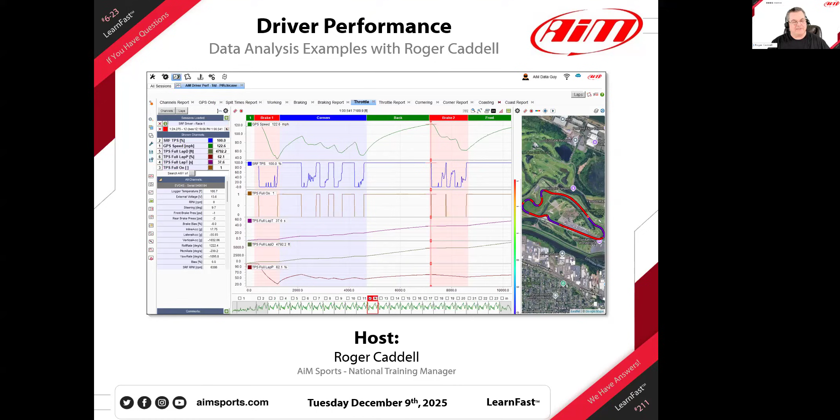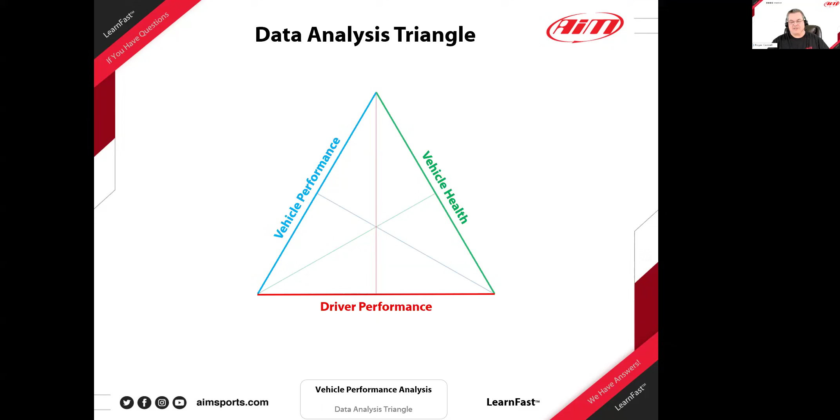So I always kind of joke about it a little bit and say, maybe this data analysis triangle is better shown as a Venn diagram, right? So you could think of it this way as well. The theory is all kind of the same, but it helps people get rid of a bit of the complexity of the data if you start to think of it this way.

The other thing I always try to make sure everybody understands, we're starting over with some of the basics here real quickly, and then we're going to jump in. I kind of build 3 basic steps for the whole concept of when you go to look at your data in analysis, what you really need to do is start to think: what happened?

I've given a few examples. You're faster average speed in turn 1. What happened? It's yes or no, black and white. I lost time braking into turn 6 compared to my previous laps or against my teammate. I accelerated better out of turn 9. These are not questions, these are just facts.

You can look at your data, you bring up two speed traces and you can look at it and say, hey, I gained some time right here, I lost some time here. So the next step is where did it happen? What happened? Where did it happen? Why did it happen?

So we're going to go across: what happened? Faster average speed in turn 1. The where piece wasn't necessarily clear, but we have to start to break it down in order to analyze the data. You got to think like a driver, think like a racer. We got to break down that corner, break down where it happened, because different things will be the why.

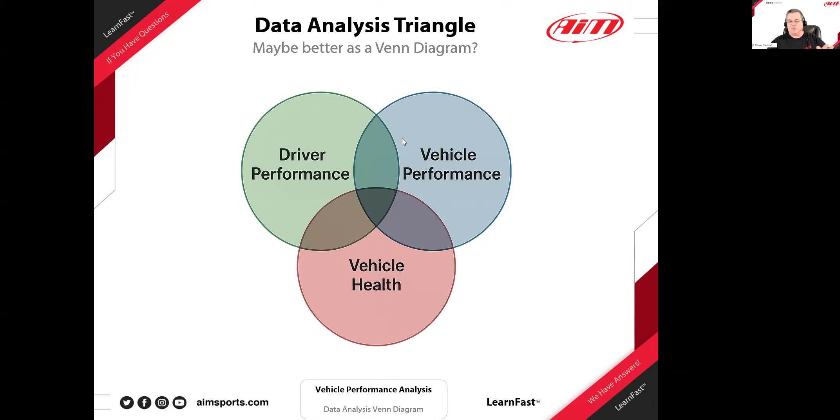If it's vehicle performance you're worrying about, kind of push the other two off to the side. They're always there, but really focus on one or the other. And then on the vehicle health, just look at your temperatures and pressures and other things, and don't worry about this. That really thins down the amount of data that you're being overwhelmed with.

Okay, and then of course you got to walk through these questions of understanding to jump in there until you get enough experience to know exactly where you want to jump into. A little bit about what we're going to do today with some of these user profiles. These are set up for you to kind of jump in and maybe skip a few of these steps once you get a handle on it.

I always think this one through - I say it in my mind: what happened, where did it happen, why did it happen. I say that because it helps me focus on drilling down and not jumping ahead and skipping a step, which can send you the wrong direction. So keep that in mind.

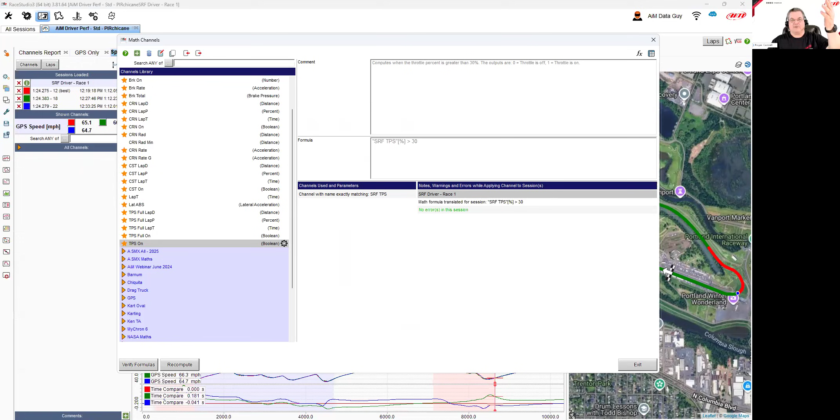Math channels are available for you. Download that zipped file and import those into Race Studio 3, and you'll have those available for you. So I'm going to jump out of that.

Let's talk a little bit about—let's go right into how I set this up. This is a user profile that in this case is called AIM Driver Performance Standard. Let me hook those in here—I'll put these into the chat box in case you missed it. I know when you join, if I put them up there earlier, you don't see them in your chat. So there's the standard user profile we're going to look at first, and then we're going to look real quickly at an advanced user profile.

This is the standard one, it's the same exact thing. You go into your user profiles box icon, you open it up, and there's the import and there's the export. So all you got to do is import it in—click on this, it takes you to it. You have to unzip it and put the standard AIM file onto your hard drive, and just import them into here. Then they will show up in your profiles manager.

The way I like to do it is it's really important to plan ahead to make your data analysis easier at the racetrack. You can do all these—you have data at home already, probably from your car. So you can come in here and set all these up sitting in your easy chair watching a little bit of TV, and you can set these up, save them, get them ready to go.

Then when you head to the racetrack, all you should have to do is download your data, apply this user profile, and come in here—we try to set things up with some tabs that make it real easy for you to go and look at the individual things you might want to look at. In this case, there's a braking and there's a braking report.

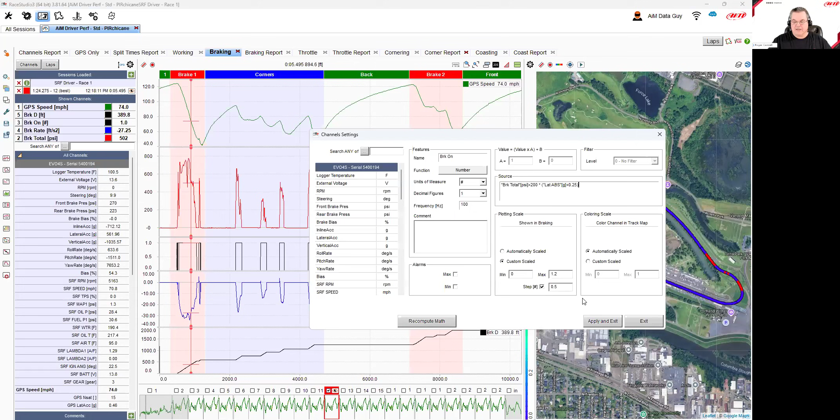So let's get out of there, and then let's zoom in on this brake one zone just to see and understand what the driver is doing here. We're looking at driver performance analysis, right?

So I'm zoomed in here, and we can see the driver comes up and the brake pressure starts to build, then it comes back off, goes back up, and there's another release here in the middle. Remember, this is his best lap - he was probably passing a car, so there was probably some movement there. We'll maybe pick another lap to look at.

So what kind of improvements? Let's say this was a good straightforward lap, and they're all like this - I don't think they are - but the thing we would want to talk to this driver about is that we really want to build this pressure up pretty quickly, hold it right near maximum braking, maximum pressure, and then start to trail off. This additional pop of the brakes is typical here at Portland.

You come here and then you got just a little bit of a straight, and if we were to turn on the throttle position here real quickly, you'll see that there's actually a blip of throttle where the driver throttled up for just a quick second, then hits the brakes again just before throttling up coming off the corner. So that's not an error, that's not a mistake, that's a typical way of looking at this particular track.

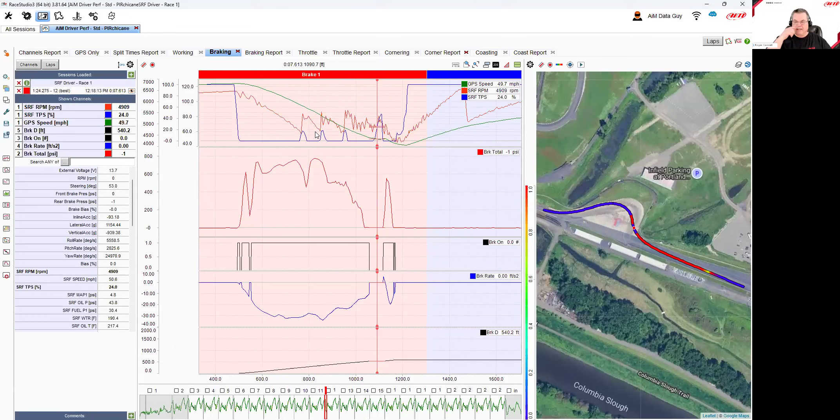At this point, the next thing I would do is I would probably back out just a little bit, and I would probably just grab another. Let me back out all the way here, and then let's just grab a different lap. That one there looks similar, right? I was just going to jump in and see if this kind of looked the same, and so let's pick a couple of other ones just for fun.

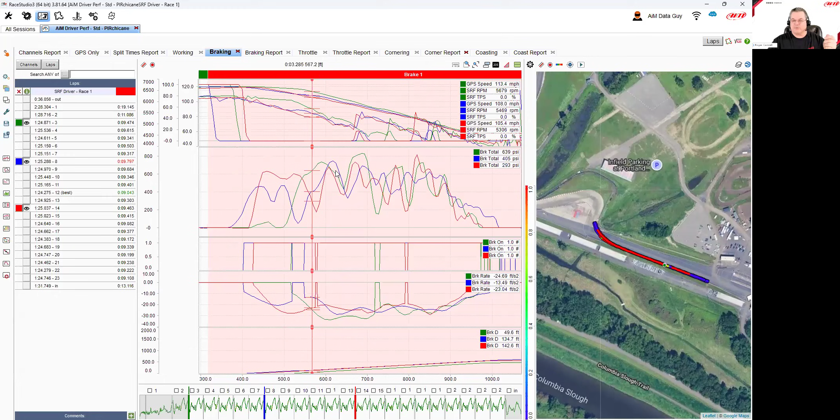Now that we kind of zoom in a little bit, we can see the driver does that quite a bit. This is probably an area of improvement. Some of these are out on the normal line entering in there. There's our what happened, where it happened, why it happened, what's something to put into the driver's little black book of things to work on and improve in the future.

Okay, perfect. So the next thing I want to do is I not only look at graphs for brakes, I also build a channels report that might be very helpful for you to look at.

Now it's a braking report. We've kind of used our math channels, some of our math channel data, some other things, and so here, what I've done is I've created a channels report, and it's the brake total. Again, that's front plus rear brake pressure, and what's the max pressure that the driver used at different times.

Looked like pretty early, the general trend here is there was a little bit more pressure at the beginning and a little less pressure here at the end, down in the 700s, 800s, and some 900s up here. And does that tell us something? We could dig in and look.

Here's the number of feet that the driver was on the brakes. Brake D is brake distance for this entire lap. This is the number of feet the driver was on the lap. When that brake on switch was turned on, this is showing how many feet. This is how many seconds.

These are all parts of the math channels we did, all built into some nice little things built in, ready for you to look at and not have to reset it up and make sure, try to make things happen real quickly. So kind of a handy little thing. That's some ways of looking at braking.

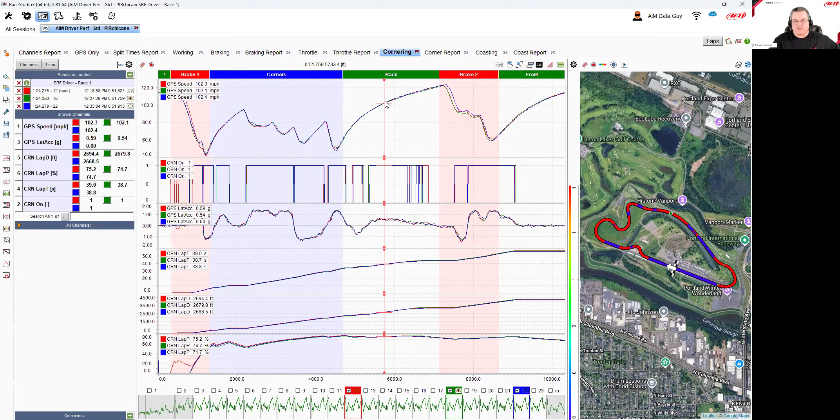I probably would adjust that down a little bit to make sure it doesn't capture that as a straightaway. But up to you, do it as you wish.

Here's the distance, and here's the percentage - real rolling time and percentage that the car is turning. Kind of interesting data just to be able to jump in and see it. We have the corner report. I'm going to go over this one a little quicker, and the next one even quicker yet, because we're just showing you what's available to you.

And then coasting, something that we all want to know about, and see if there's something. Let's get back to a single lap just to make this a little bit easier to see. On the driver's best lap, what is coasting? How do we define coasting here?

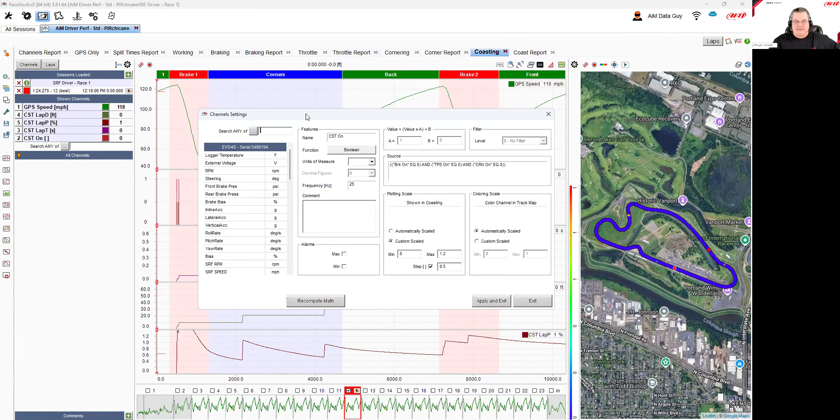Let's hit the little channel options button, channel settings. Coasting in this case is if the brake on is equal to 0 - remember the brake is only on when you're on the brake. So we're basically looking for when you're not on the brakes, as we've defined it. Remember brake on was above 200 psi.

If you're not on the brakes, your throttle position is equal to 0, so you're not above 85% throttle, and the cornering is equal to 0 - in other words, you're less than 0.25 Gs laterally. If all of those are true, we get a 1.

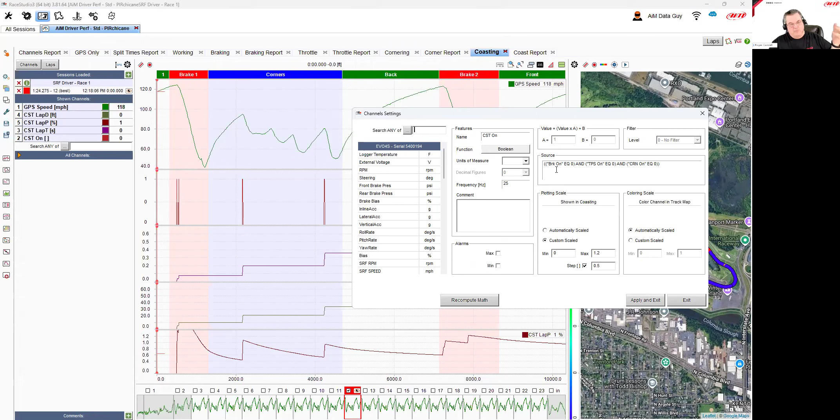If all of them are zeros, this one's going to be a 1. If any of them are a 1, you're not coasting. You can be going through a corner and not be on the throttle, not be on the brake, but at high Gs in a corner, we don't consider that coasting, even though you're not on the brake or throttle, if you're producing enough lateral Gs.

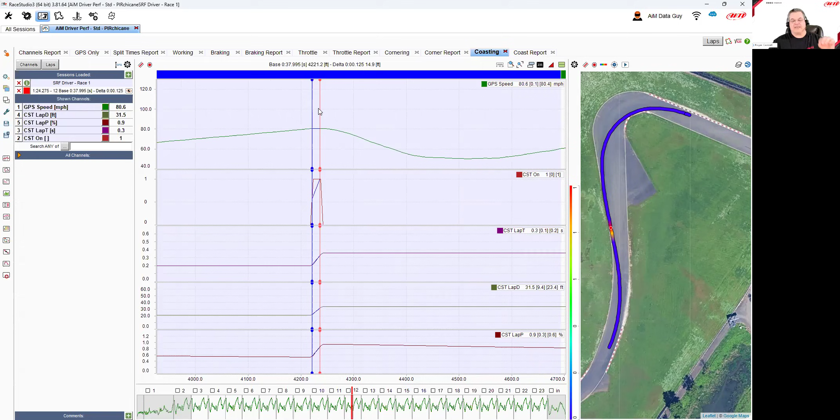So when we get in there, we can see that there are a couple of spots where there is, and most of them, if you look closely, it's going to be in a little transition period. It's typically when the driver is coming before - he's still going in a straight line, but he's transitioning from the throttle off, before he hits the brakes. If we hit the delta function here real quickly, this is really 0.125 seconds.

So keep in mind you're never going to stay coasting long. I always like to show that because people look at this and think, boy, this driver was coasting quite a bit. Well, in reality, if we put this at the end of it, that coasting was 0.8, and it was all transition periods between throttle and brake.

If they're a newer driver and you're coaching somebody, this is a really, really helpful thing when they come in and maybe they coast a little bit at the high speed transitions from high speed into corners.

As John says in the chat box, I found this data - John has shared this data, allowed me to share this data in the past here, including some questions he had. This is John Barnum from our chat, it's his son JD running at Portland.

So I used that session. I wanted to use somebody that was fairly skilled, so we could really look at and get in and look a little bit closer.

And so you can see percentages of laps, how much distance the driver coasted. Distance was only 83 feet. When you're doing 120 miles an hour, 83 feet goes by in a real hurry - only 0.8 seconds. Okay, and then a coasting report.

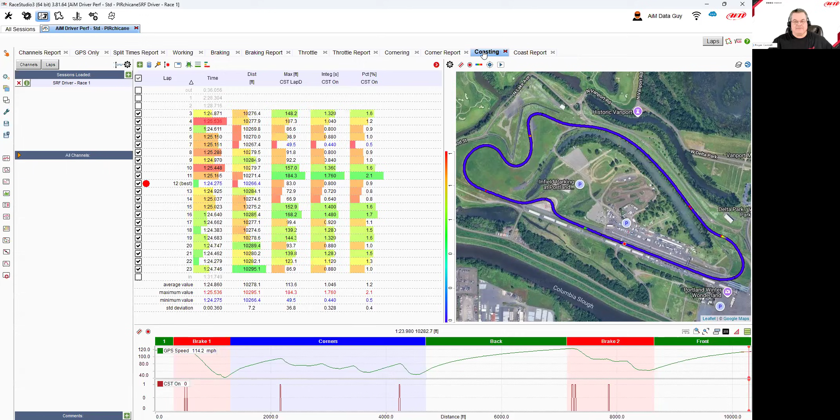We can come in and say, okay, what was the distance per lap that the driver coasted? There's a couple laps here - the one just before his best lap was only 83 feet, which we were just looking at, and the lap before was 184 feet. Let's go in, just for fun, and look at the lap before - instead of lap 12, let's look at lap 11. Let's turn off that one and see where that big difference came in.

And we're just going to rescale this a little bit. Here, 1.8 seconds and 184 feet. And there was a pretty long one here that might be a little bit still in the transition, but that was a little bit of a longer time, and a little bit right after it, as maybe he lifted.

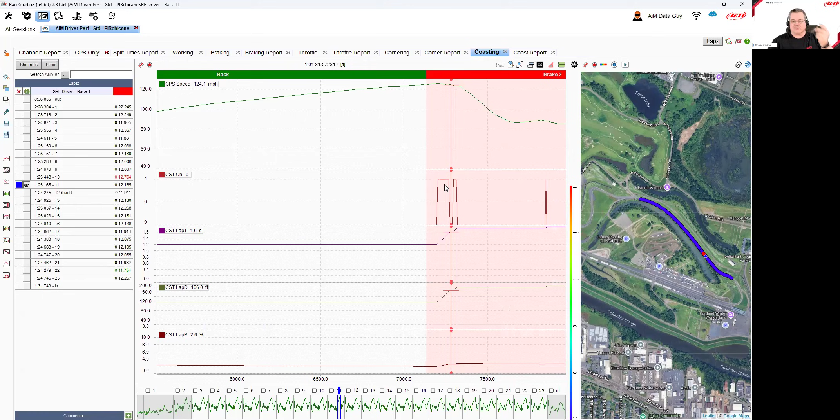We could turn on channels, figure out why, what happened, where did it happen, why did it happen, right? This is helping us figure out what happened, certainly the where, and then all we got to do is maybe turn on a few other channels to understand exactly why it happened.

So there's a few down over here, but again, pretty close to transition areas, but just a little longer transition on, especially that one right there. Looks like it climbed quite a bit. This one here also quite a large climb.

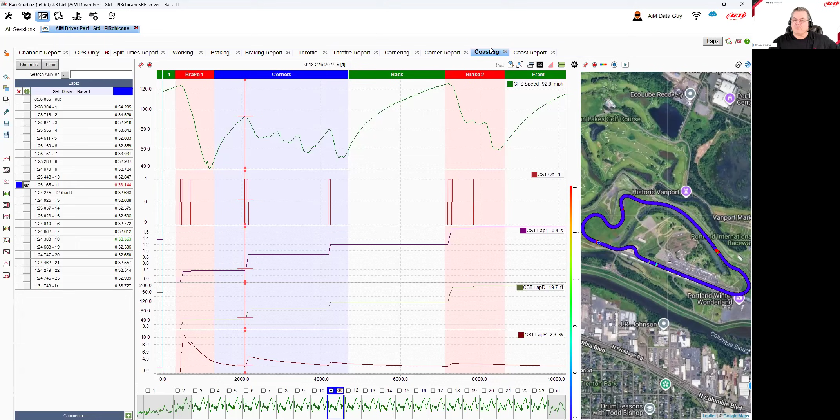Okay, so coasting reports helps us figure some of this stuff out. One other thing I've skipped over real quickly, but I want to go back to it. This one here was kind of an interesting one to me. Just a channel report where we can kind of dig in a little bit and see some other things, right? So I just thought I would show that it's part of this driver performance standard one here.

Okay, we've kind of looked at this one. Let's look at what I'm calling the advanced driver profile. I wanted to kind of split them apart. It's not super advanced, but I wanted to kind of keep them where we don't overload the profiles.

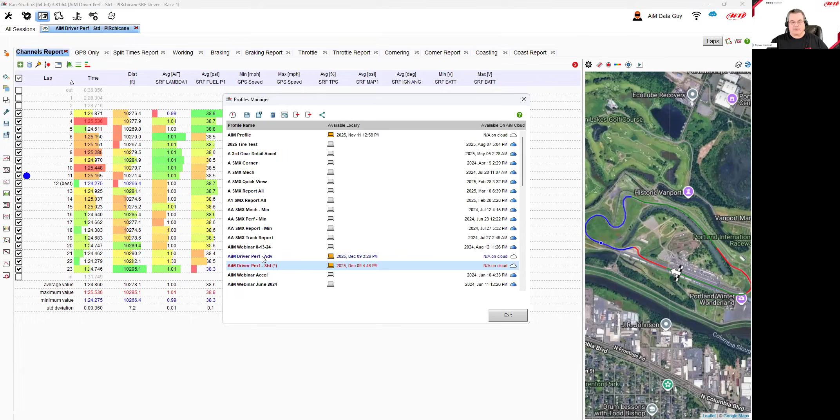So how do we change profiles? It's as simple as going into our profile list. Once you've saved it into your list here, we can come in here, and here's our AIM driver performance advanced. So if we just double click on that, it goes in, retains that exact same data, sits there on that same lap we were just on, and it changes everything.

And this is just a real basic one, but has a few more math channels applied and looking at it in some different ways. And I thought this would be kind of a cool way of kind of closing up the session as we finish up today.

I always end up with a scratch tab. You can call it work, it can say anything, but it allows me a place to come in and just add channels and do different things however I wish to do it, right? Without worrying about screwing up the true tabs that I probably don't want to add channels and change a ton of, at least at the track during the session.

So if we come in here, here's another corner tab. We kind of see the same things we were seeing a little bit ago, but there's a couple of additional things here. There's the speed. We have our corner on. We're going to focus on cornering.

We have a corner rate, and what it is, it's an absolute value of the corners, and I put it in feet per second squared instead of G's. Here's your lateral absolute in G's. So these are exactly the same shape. It's just one is 1 G equals 32 point some feet per second squared. It's an exact value, just much larger number.

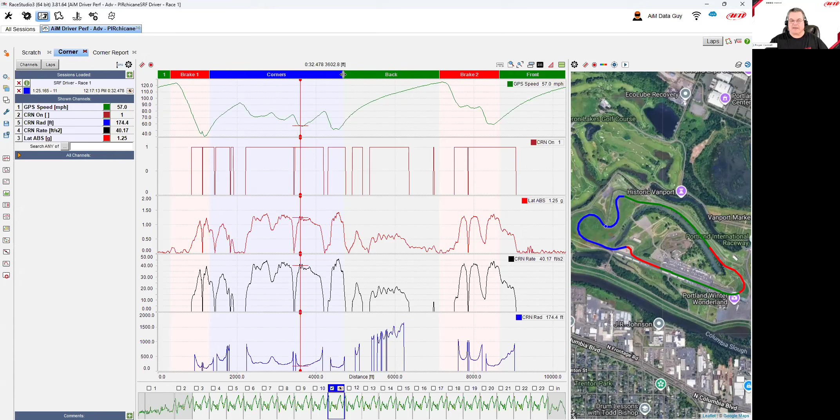So I always create just a bunch of different track map segments. You'll see here there's an acceleration one. I have one for some compliance testing I do. There's corners, there's lap times, there's your standard one for splits, there's one for straights, and there's one here that I saved for a webinar we did.

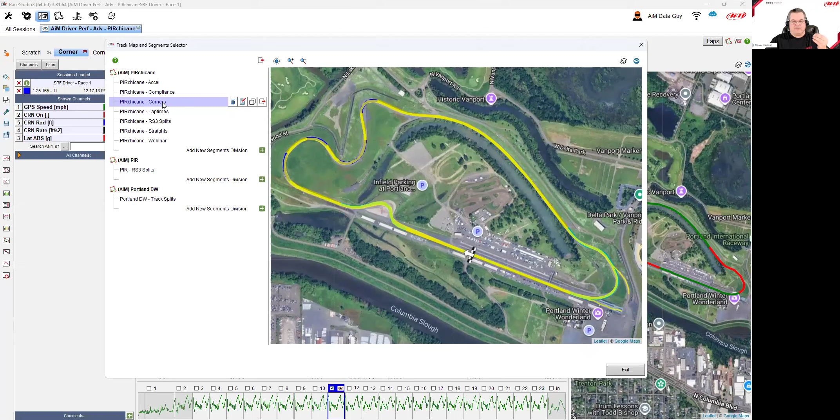So in this case, I'm going to select corners, and I broke the track into different segments, which you're going to see why the power of doing some of what we've been talking about so far, but doing it in a segment-based world is very powerful.

So I'm going to highlight that, and click on OK, or exit. You're going to see that these segments have changed. What I do is I use blue for corners. You can do it any way you want.

If I zoom in a little bit, you're going to see that this is Portland, and this is turn 4 at Portland. You can see there's the dot. This is turn 4, turn 5, turn 6, and turn 7.

Some of these other corners, I've left them a different colored blue. There are some other corners here, but they're not really great for what I'm going to try to show you how to do. So you pick a corner that is basically you G up, and then you sit there for a little bit, and then you come down off it. You don't want one where you just peak and then come right back down.

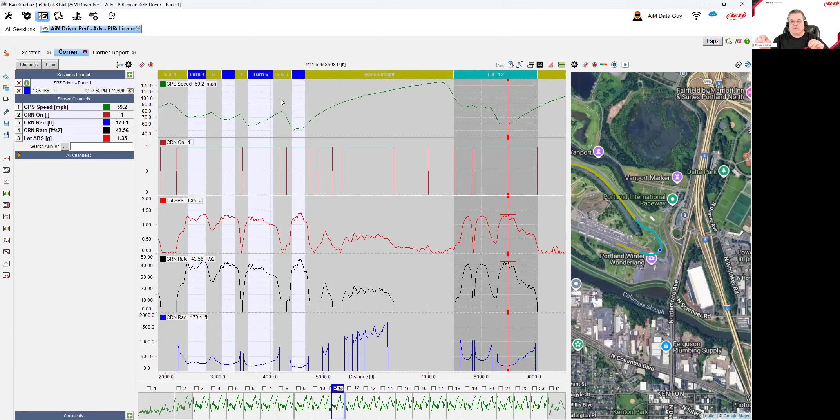We're trying to figure out how good the driver is about getting into the corner, or how good the car is. Getting in the corner, how's the car performing with that driver in there? So we've done some math channels to help us do that.

So I'm going to zoom in on turn 4, zoom back out just a tick. In our corner tab here, you can see the lateral G's. Let me back out a little bit more even. You'll see that we're coming into the corner right here. We're still back in here, we haven't started turning in yet.

I don't want to capture the turn in. I don't want to see how good the car transitions. Maybe I do, but in this particular thing I'm going to show you today, I want to show you that I broke down the segment of turn 4 when the car achieved maximum G's, and I looked at a number of laps, and it's pretty consistent here. And then over here is where it was still at max G's before it started to fall off. So I segmented the corner and called it turn 4.

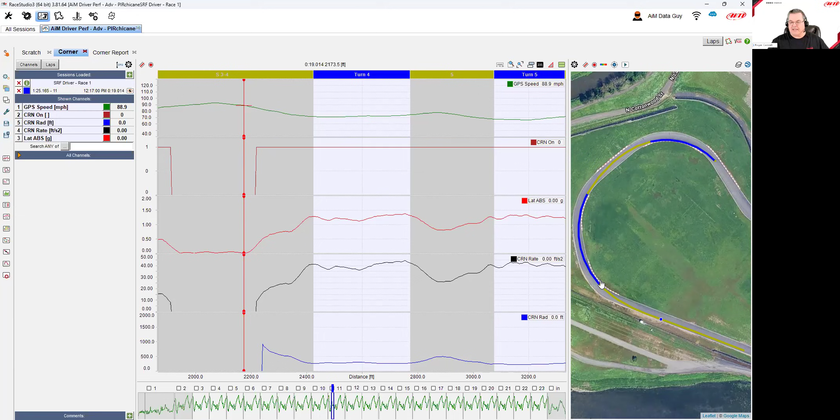So basically the car is at full lateral G's here and full lateral G's here. What I then want to do is see how the driver drove the corner, as far as did he diamond off the corner. You can kind of see he released his hands a little bit here. This number is a little bit bigger, 302, than 261. So right here the driver tightened up the corner in this area. Little things like that. I want to know what the average G's were in here.

So let's go to the corner report, and let's show you some pretty interesting things you might want to be using in maybe some of yours.

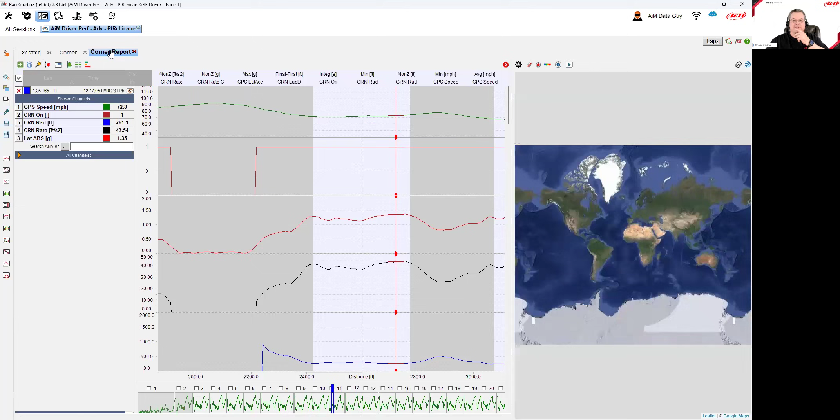Here is a very detailed way of breaking down a corner, but this is the entire lap. In this case, I've turned on the segments. I've told it I want to see the segments in this particular corner report. So I'm going to go down to turn 4. Here is turn 4, and kind of some fairly interesting things here.

Let's go to turn 5. It might even be more interesting. Turn 5 is this corner over here, right? So what we're looking at is how much time it took to get through the segment.

It's the Race Studio software, the corner report, this channel report. If you're using segments, wherever you broke the segment start and end, it's telling us what the time you were in there, the distance, and then I've done some things here where I took that corner rate and done the average outside of zero, non-zero, giving me the average when it was not zero.

Here is the average for this corner for every time through there in feet per second squared. Here it is in G's, for those of you that are a little bit more comfortable looking at G's. Here's that.

Here it is the maximum G's that the driver hit in the corner. You can see this is about 1.38, 1.14, 1.36. And here's the average G's in the corner. Something you might want to know.

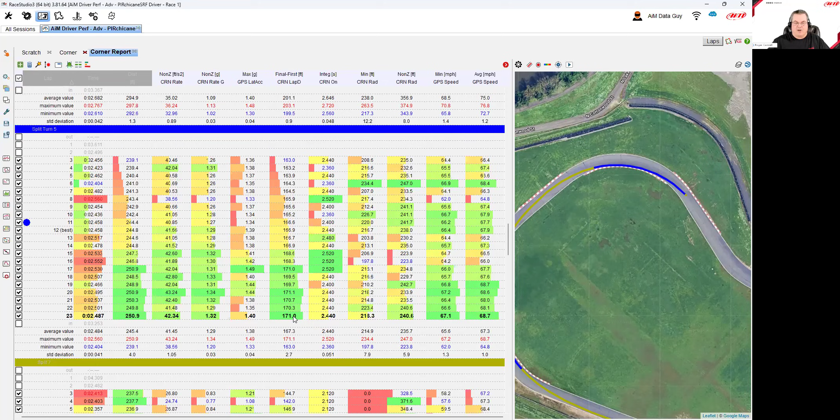Let's leave it on this one for a second. Let me go back to the corner, I want to show you something. Remember we talked about how the driver kept getting longer in distance, as we close this up. Let's go back to the corner, and let's go back up, let's zoom out so we can easily change laps here a little bit easier.

Let's leave this one in the middle, let's grab an early one and let's grab a late one. I'm just randomly picking here, and now we can jump in here. Remember, it was this corner here that we were looking at. Let's change the layout of that real quickly.

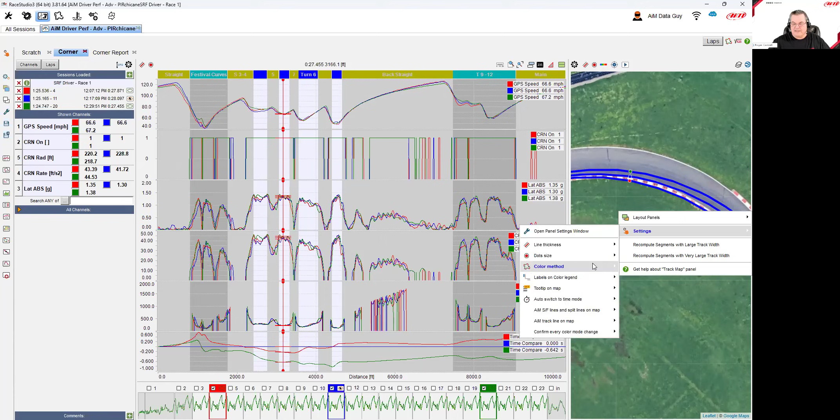So now I'm going to do it a little bit differently. Color method, let's color it by lap. Okay, so the green one was a little bit later.

Let's zoom out on that a little bit so we can see the whole thing. Maybe a little bit more. Let's move this over just for fun, make it a little easier for everybody to see.

Remember, the red one is the early lap 4. Look at how it was tight and holding it tight coming off the corner and getting set up for this next corner, maybe a little bit better. The blue one in the middle, remember, started to run a little bit longer laps, he was starting to free it up. And then the green one, even more so, even a little bit earlier, he started to free up the car. Driver may have had a good reason for that.

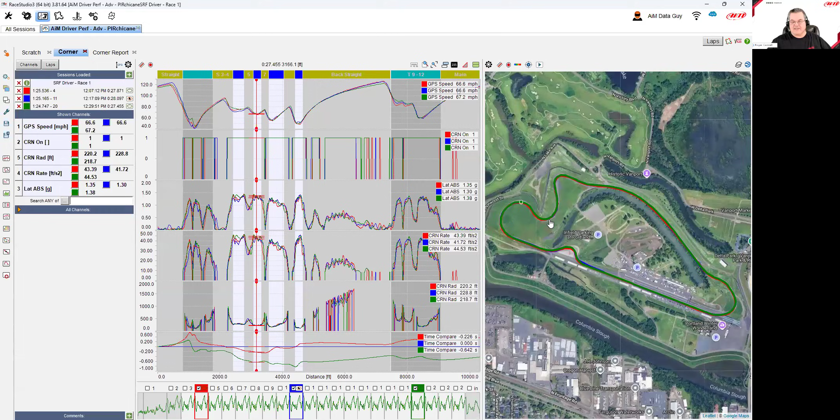We can dig in. We kind of know from looking at the corner report that generally speaking, the faster laps were coming with the shorter travel distance. So maybe this stuff that was a little bit earlier might have been working better to get through there.

And then we would want to study this next corner and understand if that helped there too, right? Because just because you do one area right, you could hurt the next one. So we'd want to dig in and look a little deeper.

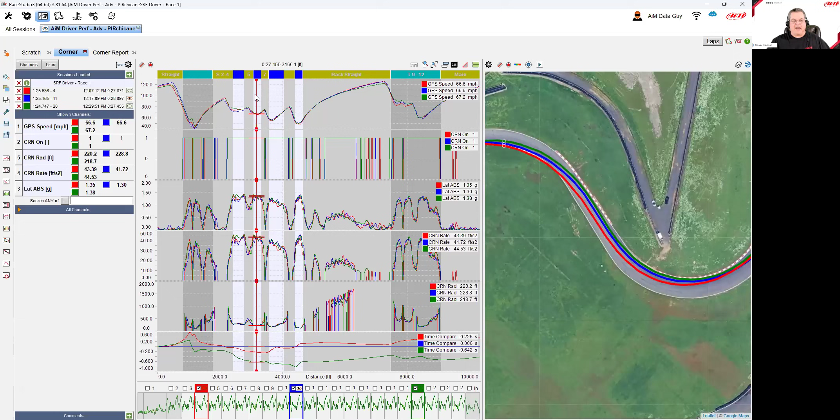Just giving you some ideas of how to read this, and with some of this additional information in this advanced profile that I've shared with you, might be something that you can use for yourself. You could build this exact same thing with a lot of these same things for braking and for acceleration, in all of the different areas that we might want to look at. You can use these same templates of math channels to build for other things. I just shared the cornering one with you today.

Hopefully that helps with some of the different things that we wanted to talk about a little bit today.

The whole driver performance data analysis piece is probably the most used piece of the software, the main reason people use Race Studio 3 Analysis. It is our bread and butter, the core of what our customers do. They've got their car and they're trying to get themselves better, while also looking at vehicle performance and vehicle health. This is a big piece of what they do, and I spent a lot of extra time here, not necessarily telling you how to read every single line, but wanting to give you a tool with these user profiles and math channels that you can take away, adjust, and put together to see if it works for you.